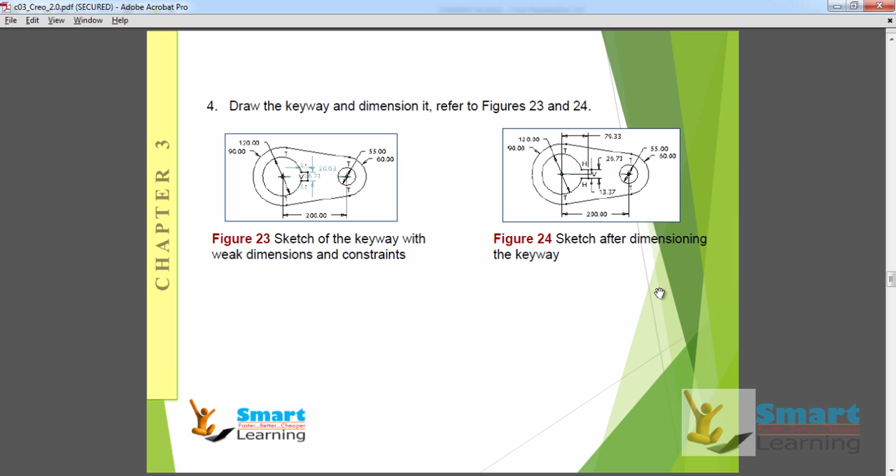As discussed in project 1, first we are going to insert a sketch which we have created in our previous chapters, and we are going to add a keyway to that sketch, and finally modify the dimensions so that we can create the sketch as shown in figure 21. So let us go back to Creo.

Using a file system, you can insert the sketch which we have created earlier. So let me choose the sketch and say open. Here you can see as you click, the cursor is looking for the insertion point. As you click randomly, the sketch will be inserted at that point.

So I click here, and here you can see this is the base point about which the entire sketch has been inserted. If you want to change the base point, suppose for example I want this center of the circle to be a base point, I can click on this base point and then click on the new base point.

So just choose the center of the circle. You can see the base point is moved to this location, and about this base point you will be able to move the sketch wherever you want.

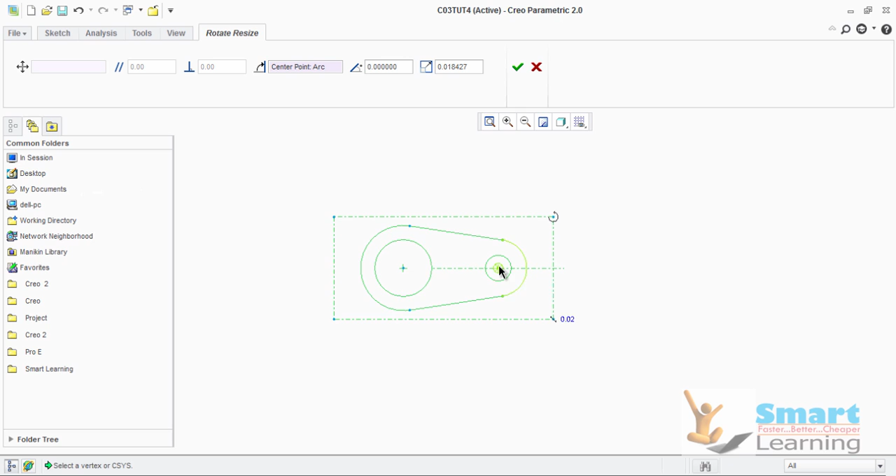And suppose if I want this circle to be a base point, I can click on this base point and again click on the new base point of the circle. So here you can see this way you can change the base point of the sketch we are going to insert.

So let me choose this as a base point as it is, and here you can see we have options for rotating. Here you can enter the angle value so that the sketch will be rotated at that angle. And here we have the option for scale.

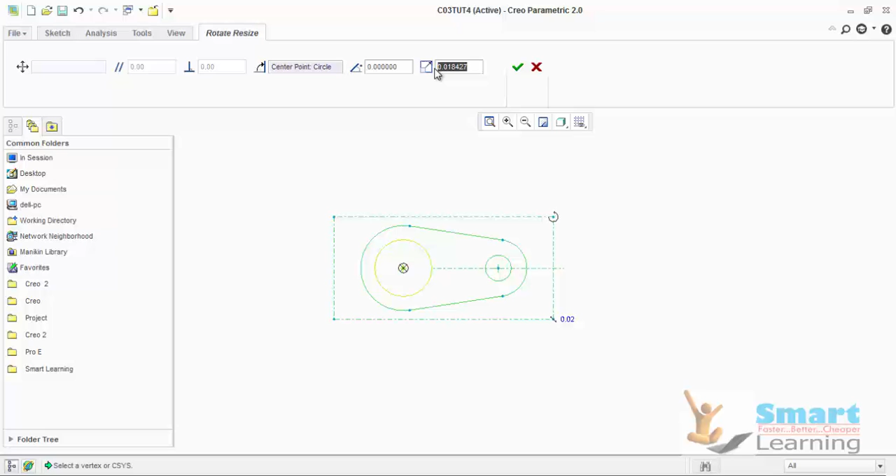If you want to insert the sketch at 1:1 scale, you can enter the value as 1. If you want to reduce the scale, enter a value less than 1. If you want to enlarge the scale, enter a value more than 1. So let me insert the sketch at 1:1 scale, enter the value, and click OK. Here you can see the sketch is being inserted with 1:1 scale.

Next, let us create a keyway using a rectangle. So you can just draw a rectangle, choosing any point in the circle. I can enter the value here, and using this delete segment option we can remove the unwanted sketch entities.

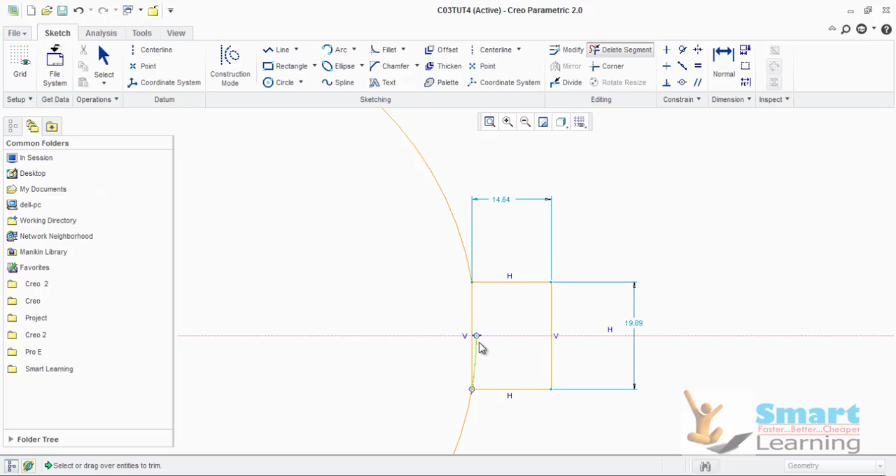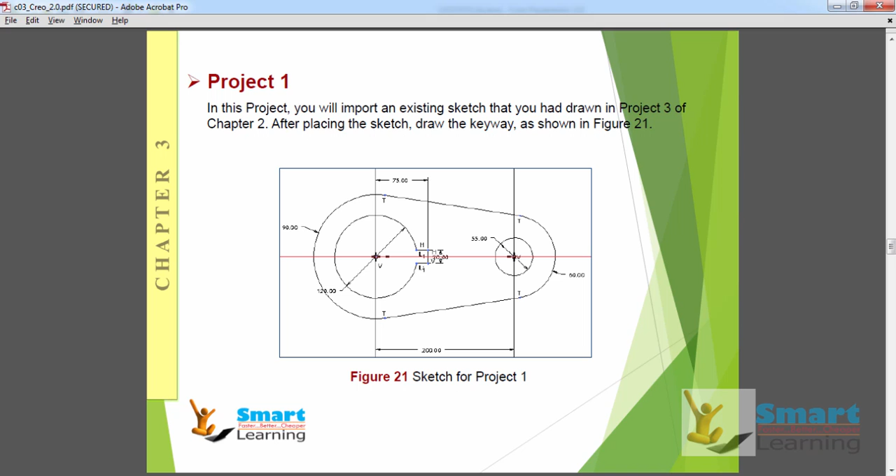So just by clicking on it, we can edit the dimension values of this keyway. As shown here in the sketch, the keyway dimension is 75 from the center. Using the normal option, you can add a dimension from the center point to this line as 75.

You can enter the value as 75. So just come out of the sketch, go back, edit it, set it as 75, and enter the value as 75.

You can just drag the sketch, and again double click here and enter the value as 75. You can see the sketch value is updated to 75, and the width of the keyway is here. If you want, you can zoom in - it's 20 mm. You can click on 20 mm, so here you can add another dimension, as the dimension of this is 20 mm.

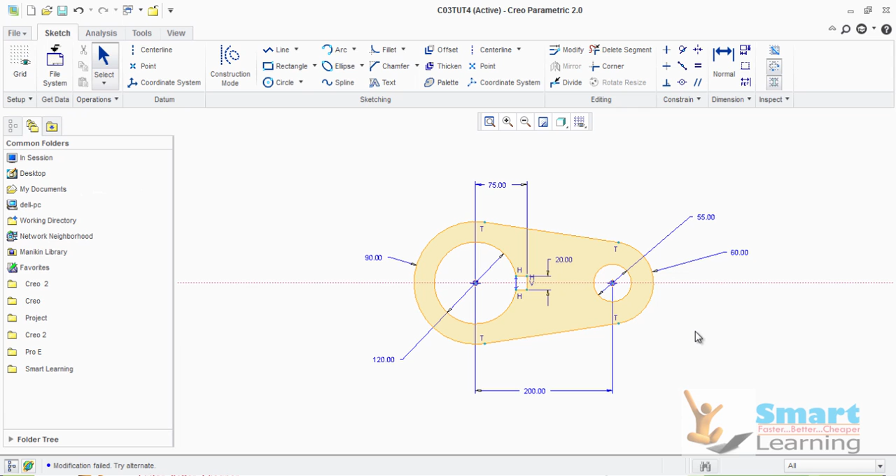So you can see this way we can insert the sketch which we have already created, and modify those sketches using any other sketch options, and you can create the required sketch profiles. So this completes our project 1, and let us go back to our presentation.

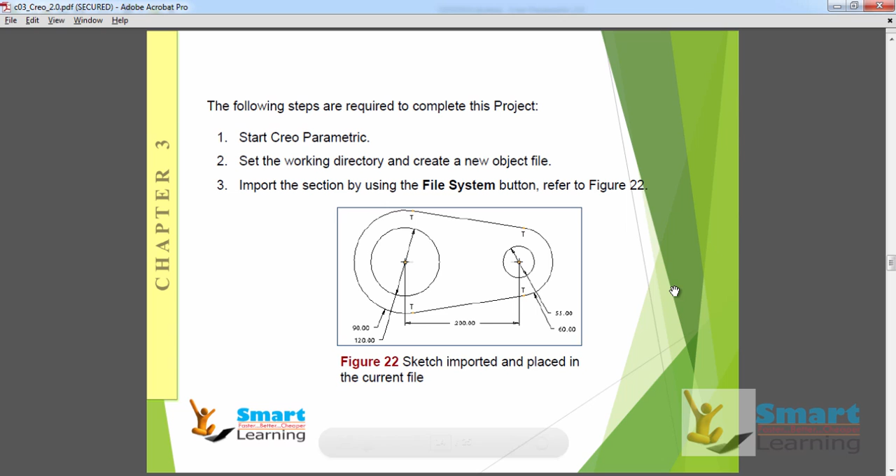Let us go back to our presentation here. So as shown, we have completed project 1, and next in project 2 we are going to create a sketch as shown in figure 27. This sketch is used for creating a model as shown in figure 26.

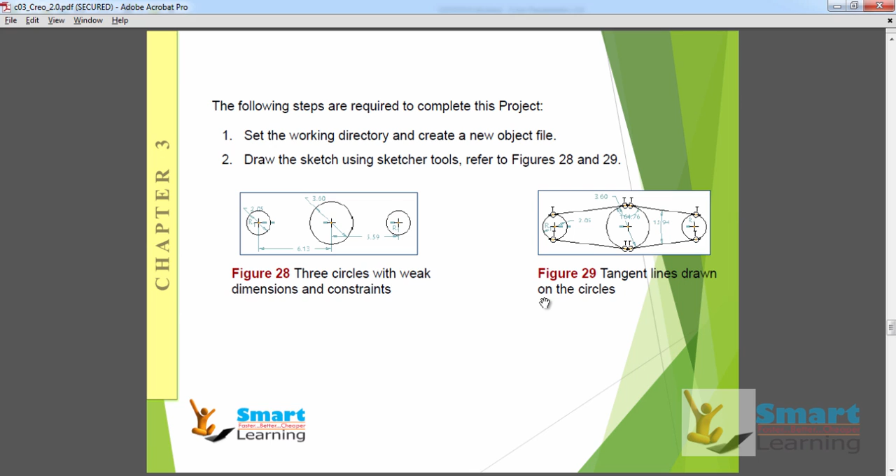So first we will be creating 3 circles as shown here, and we will be creating a tangent line which is going to be tangent to all these 3 circles. Then we are going to trim the unwanted sketch entities, and finally we are going to modify the dimensions to get the final shape as shown in figure 33.

So let us go back to Creo, and you can create 3 circles as shown here. So let me delete these sketches. Using the circle option, let me create the center circle, and you can add the dimension to this. The diameter of this - the radius is 35, so the diameter will be 70.

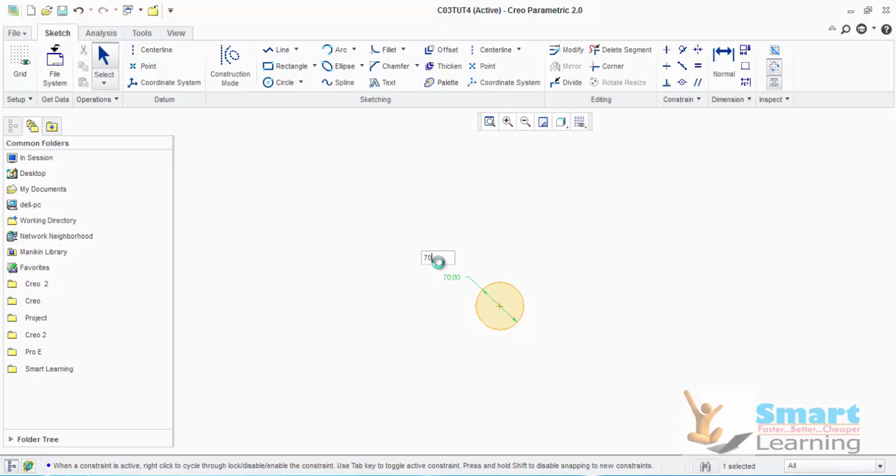And here you can draw 2 more circles. You can see you can take the center as a reference. And here you can enter the diameter values for these 2 circles. The radius of this is 25, so I can enter the diameter as 50.

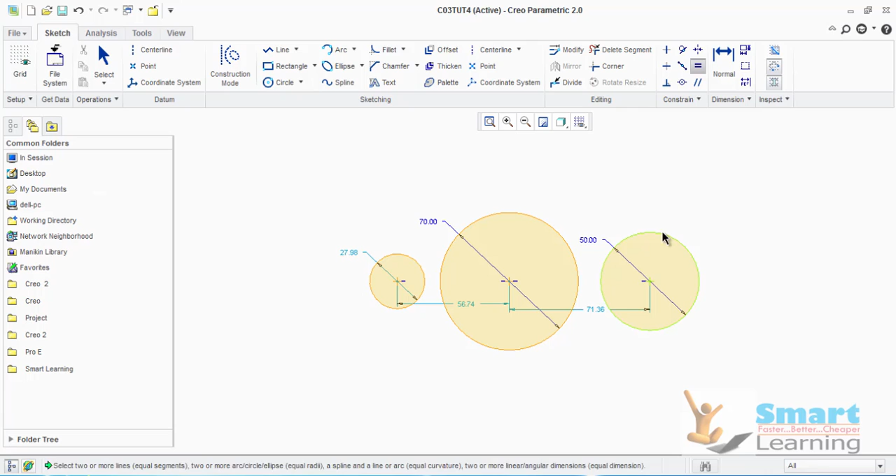And using the equal constraint option, I can select these 2 circles so that these 2 circles' radius becomes equal, and then I can edit the location values for these 2 circles as 120 from the center, so 60 from the center. So I can enter the value as 60, and again here you can enter the value as 60. So we have given all the dimensions to fully constrain the sketch.

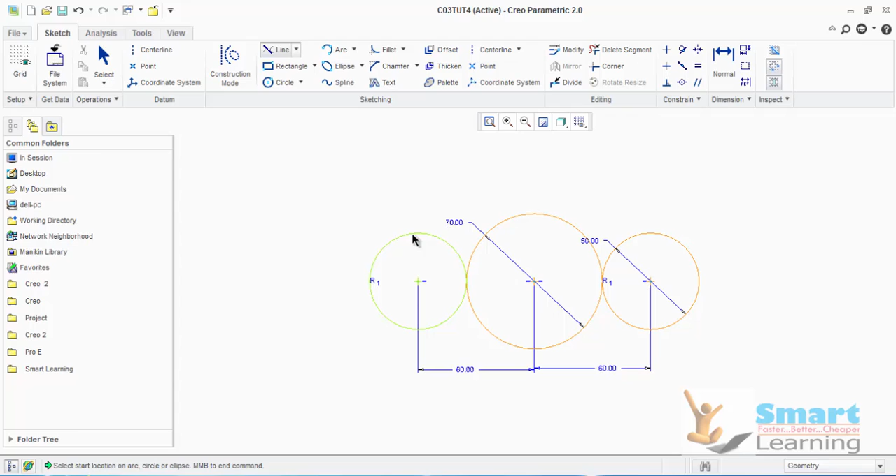So now, as discussed, we have to draw the tangent line using the line tangent tool. We'll draw the tangent line between these two circles, and from here to here again a tangent line, and from here to here again a tangent line. As you can see, as I draw the line, it applies the tangent constraints automatically.

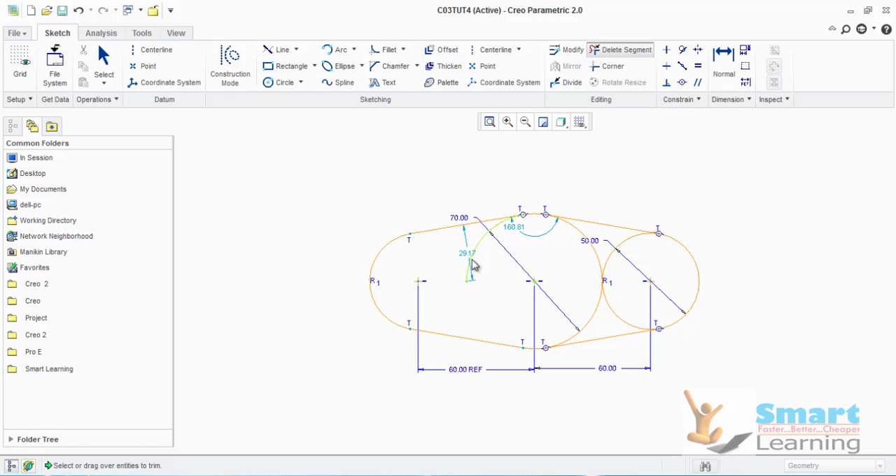So I can come out, and using this delete segment option, we can trim the unwanted sketch portions. Just by selecting those particular sketch entities, you will be able to delete those unwanted sketch entities.

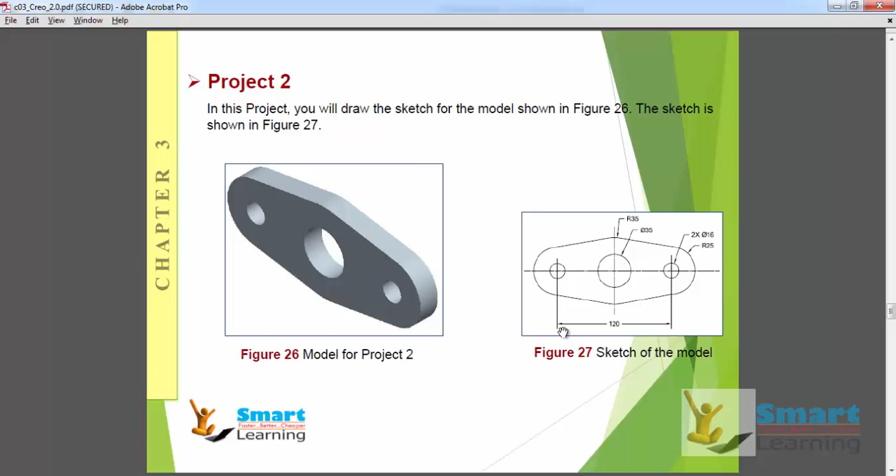So as discussed, we have created the overall shape, and let us create the 3 circles as shown in figure 27. We can go back to Creo, and using the circle option you can create a circle here and here.

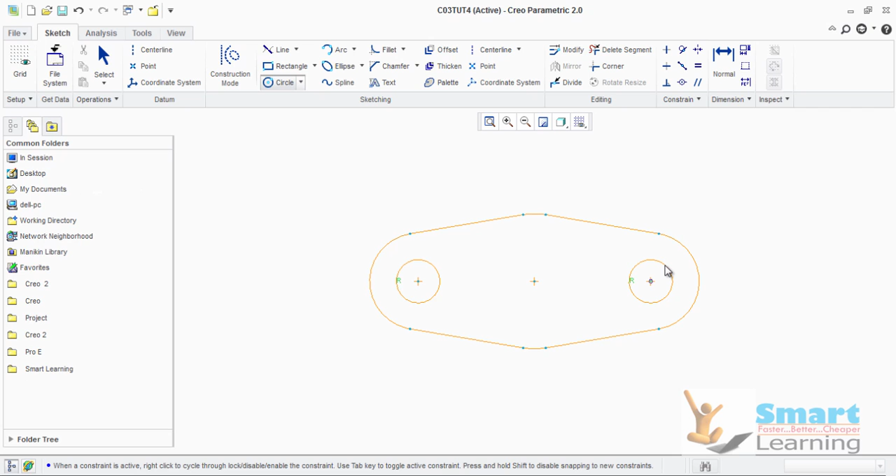And if you want the circle radius of these 2 circles to be the same, you can see as you move the cursor, it shows R in both the circles. It means that it applies the equal constraint automatically between these 2 circles. So you can just click as it is, so that the equal radius constraint is applied automatically.

And let us create another circle in the center. You can create another circle in the center, and you can edit the values of these circles. You can see the 2 circles having the diameter of 16, so here you can change the diameter to 16. You can see both the circles are being updated since the constraint has been applied automatically, and the center circle diameter is dia 35 - you can update this value to be dia 35.

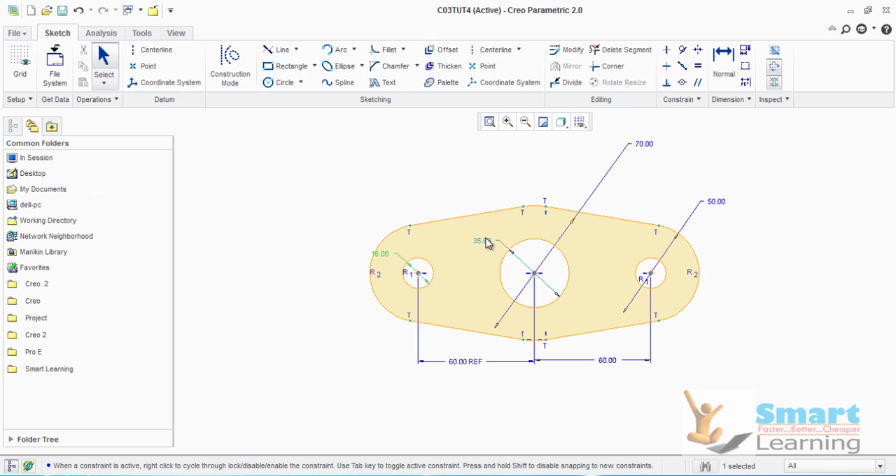So this completes our second project. You can save the sketch and exit the sketch mode.

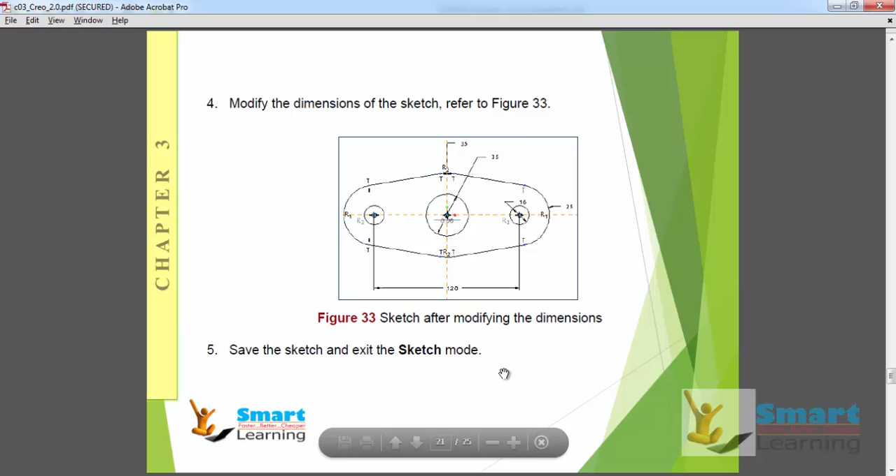Next, let us see how we can create the sketch for project 3. In this, we are going to create a sketch as shown in figure 35, which is used for creating the model shown in figure 34.

Let us go back to Creo. You can delete these entities, and we can create the entities as shown here. First, let us create a horizontal line with the dimension of 480.

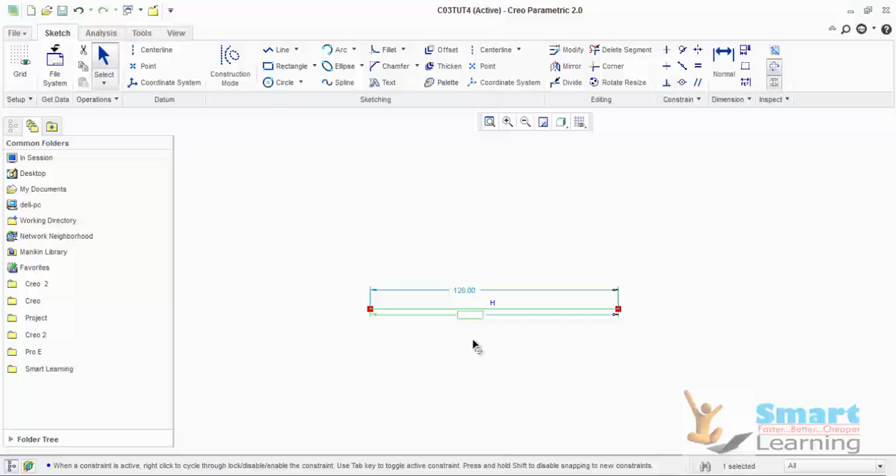Let's go back to Creo. You can draw a line using a line chain. Draw a horizontal line, and I can dimension it 480. See, so the sketch is updated.

Then we can create the lines as shown here in figure 36 for the dimension shown in figure 35. Using the line option, let me draw a line.

Let me draw a line, horizontal line. I can edit this dimension as 480 as shown in the sketch. Using this line chain option, I can start creating the lines as shown in the sketch.

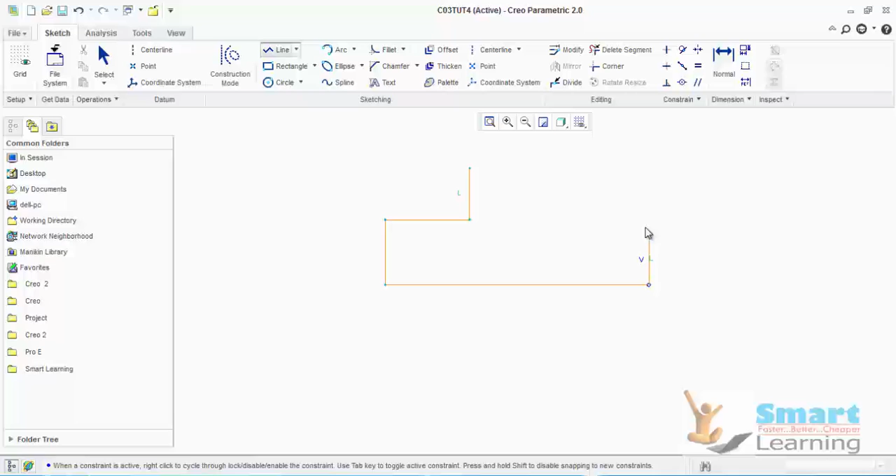And you can create the same kind of lines on the right side of the sketch.

Here, so you can add an arc. Using an arc option, you can select these points and click somewhere here. You can see how here, as you can see, this fillet, the arc is not tangent to this line, so you can just add a tangent constraint on at least one side.

And here you can enter the radius value of this arc to be 65. So the radius of the arc is updated as 65.

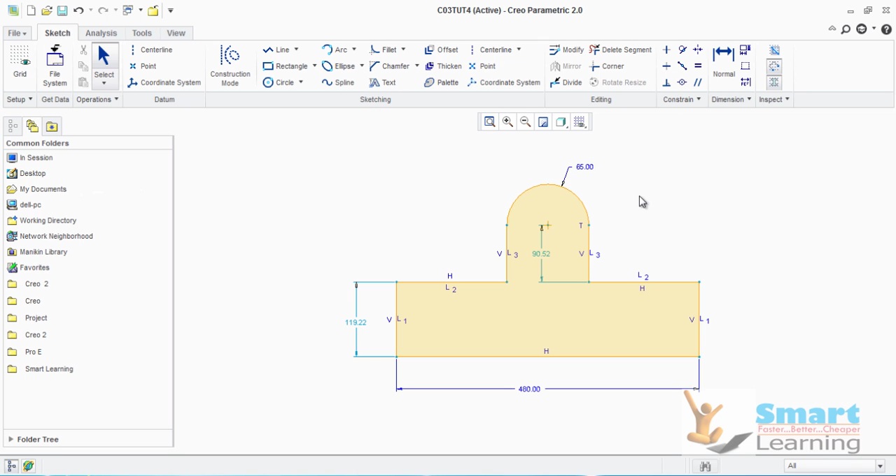You can add the other dimensions as shown here. Let us add the dimension 40. You can click on here, or edit this value to be 40, and here you can update this value to be 55 as shown in the sketch.

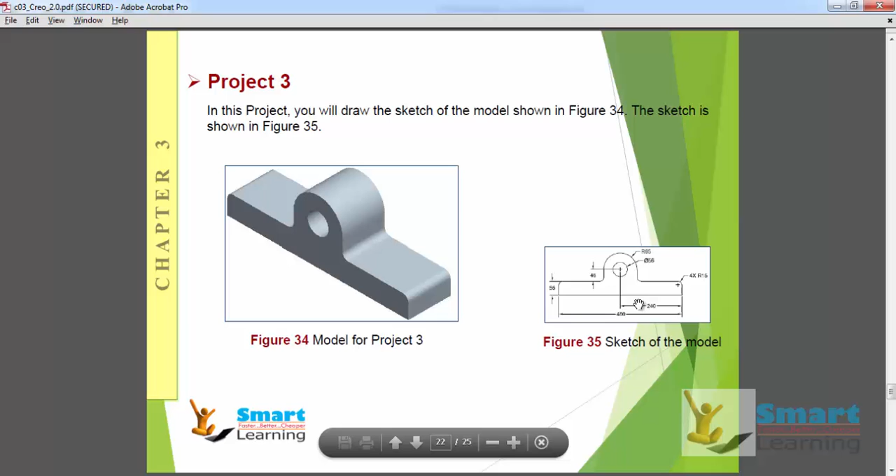And let's go back, and we can add a circle with a diameter of 56. You can click on the circle, add the circle at the center again. You can edit the diameter of this value to be 56. You can say enter.

So we have created the overall shape of the sketch shown here. Here, for the third step, we need to apply the fillets in the corners as shown in the figure. So let us go back to figure 35.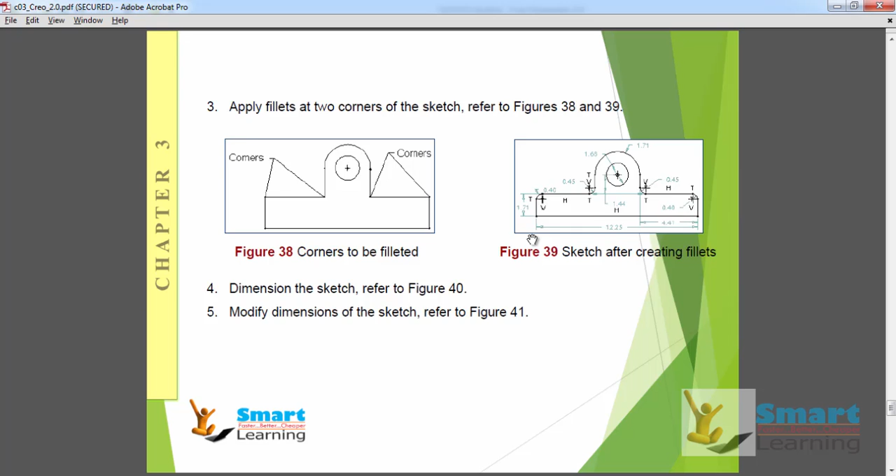Here you can take the value of this fillet as R15 for 4 corners. These 4 corners are shown here in figure 38. So this is where we are going to apply the fillet of R15.

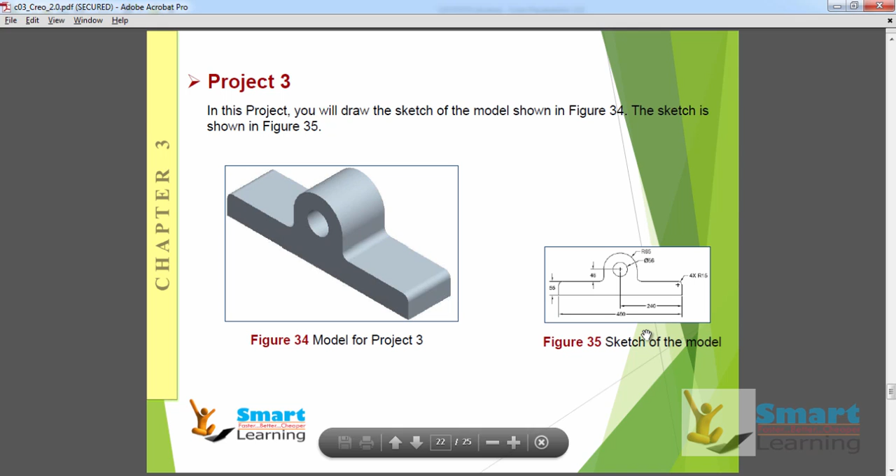Let us go back to Creo. Using this fillet, you can create a circular fillet, and select the 2 edges where the corners, or 4 corners, are formed as shown in the figures.

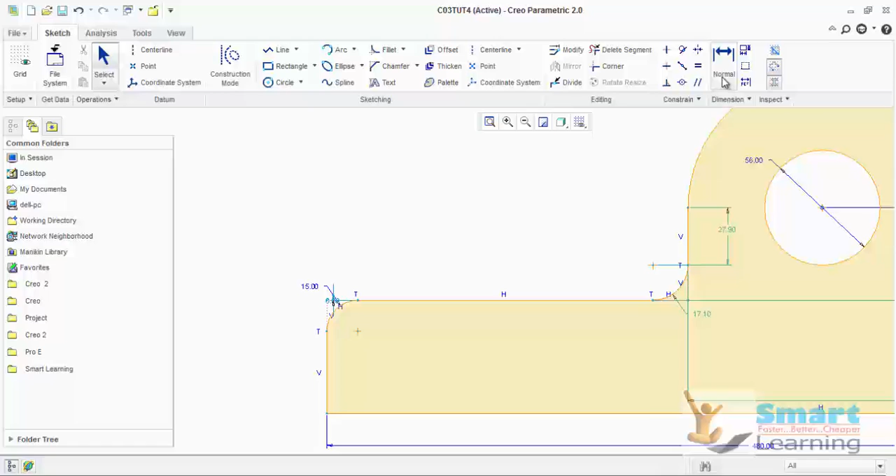And here you can see the fillet has taken a default fillet value. You can apply the fillet value of 15 here, and using the equal constraint you can select this arc, once again this arc, and also this radius. So now you can see the equal fillet radius is applied in all four corners.

So whenever we change one value, the other fillet values also will get changed. Again, here you can see this dimension is modified, and you can update it to 55.

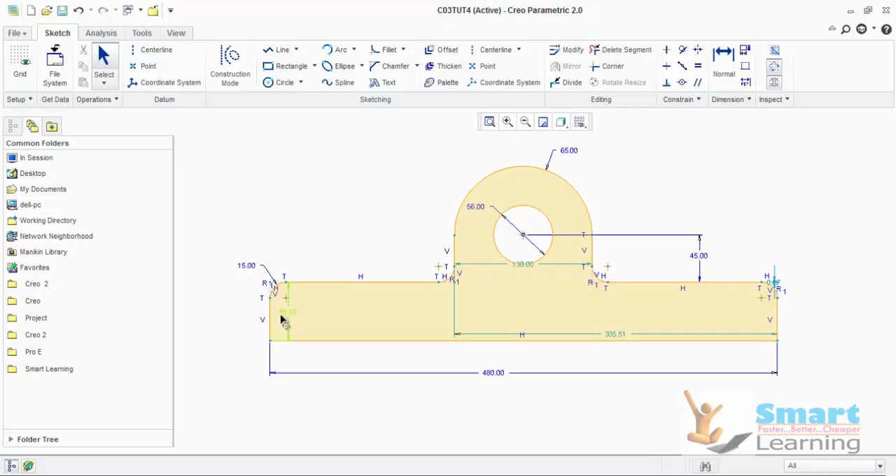And so this completes our third project. But before doing that, we need to position the center of this circle. So you can click on this. From the center of this to this is at 240.

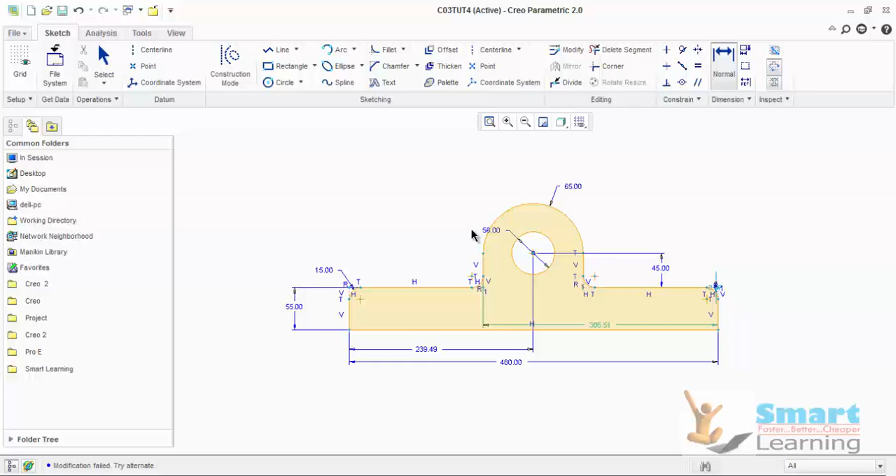And here you can see still this arc is not tangent to this. Using a tangent constraint, you can select this and this so that the arc and the line become tangent as shown in the figure. And again here you can change the value to 240.

And this completes our third project. So you can save the sketch and close it.